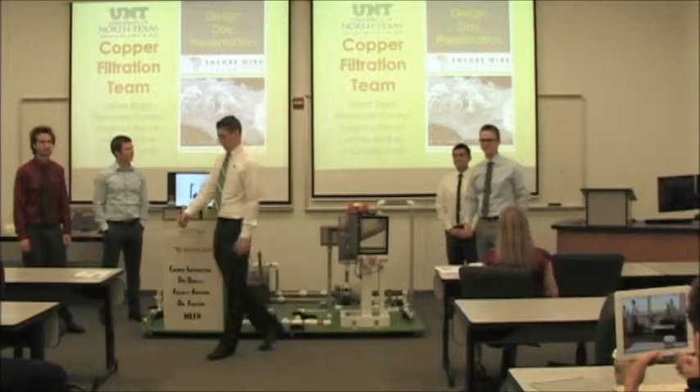So the problem statement: in Encore Wire's current wire drawing process, there are microscopic fines that are contaminating the lubrication system used to prevent copper from breaking. These microscopic particles produce heat, friction, and eventually a manufacturing shutdown because the wire breaks. So our task is to eliminate the current paper filtration being used and improve the current filtration amount that they're reaching.

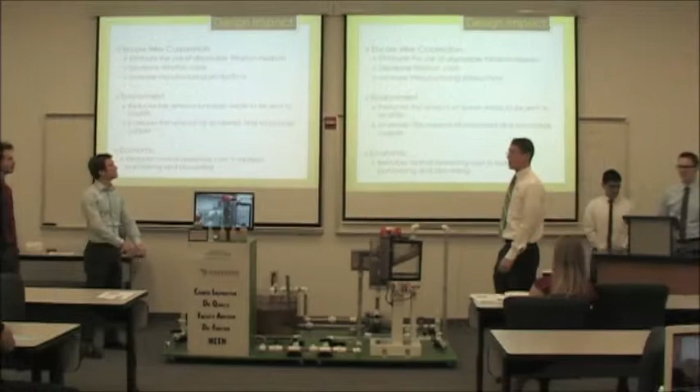Encore Wire wants to eliminate the use of paper filtration, and this is important because it decreases filtration costs, and also we can capture part of the copper that would be actually thrown away. This has an environmental impact because it prevents paper from being put into landfills, and is also recapturing the copper to be recycled and made into copper wire. So overall this will impact Encore Wire's manufacturing, purchasing, and discarding.

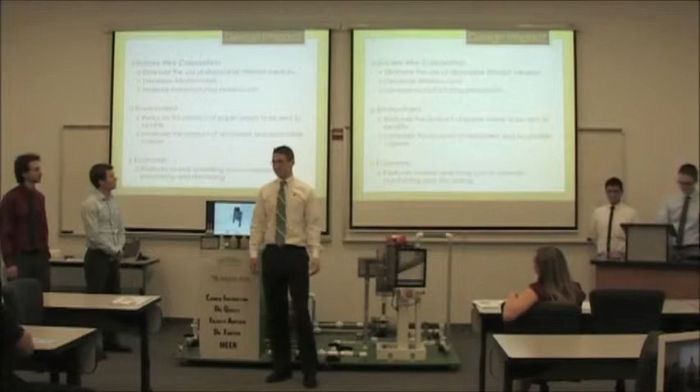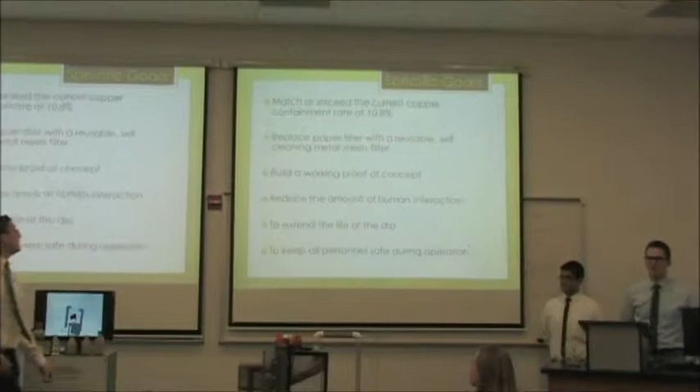Specific goals the team has set are to achieve the 10.8% copper containment that they're actually filtering with their current method, replace the paper with a reusable metal mesh screen, build a working proof of concept - as you can see here, we have that - reduce the amount of human interaction, extend the life of the dip, and maintain safe operation capabilities for their employees.

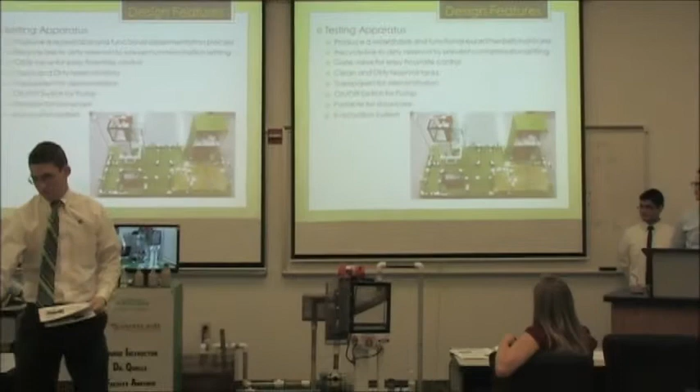Some of our design features and testing apparatus: we wanted to produce a repeatable and functional experimental process. Some of the pieces of it - here we have our 1 horsepower centrifugal circulation pump.

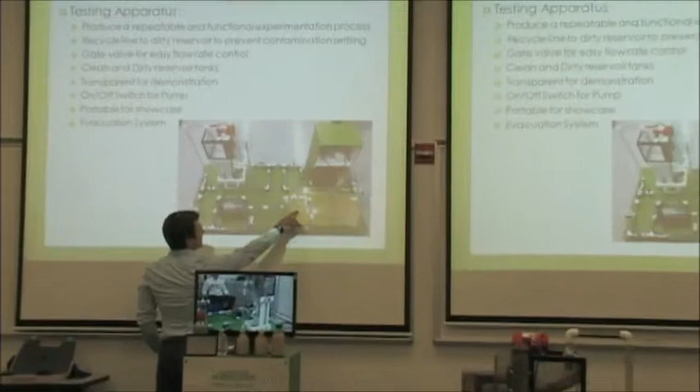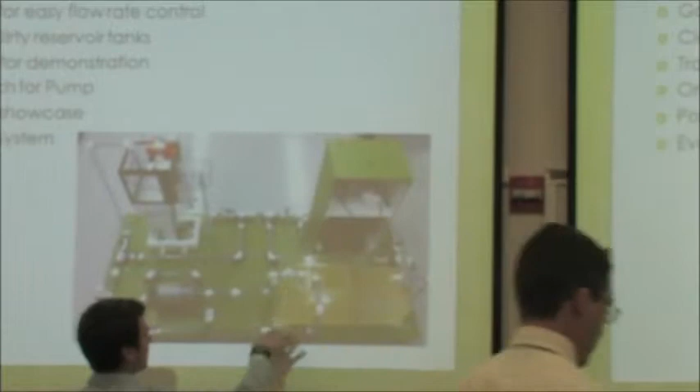It draws here, so here's your inlet pipe from the dirty reservoir, here's your outlet, and here you have a T to split that flow. There's two reasons for this. One, a majority of the flow is circulated in this recycle line back into the dirty reservoir, and that'll actually stir up the copper filtrate, the copper fines, so they don't settle at the bottom - we want to keep those agitated. Second, this blue handled gate valve allows us to closely regulate the flow we send through the rest of the system, because we can't flow 100% of it through our module.

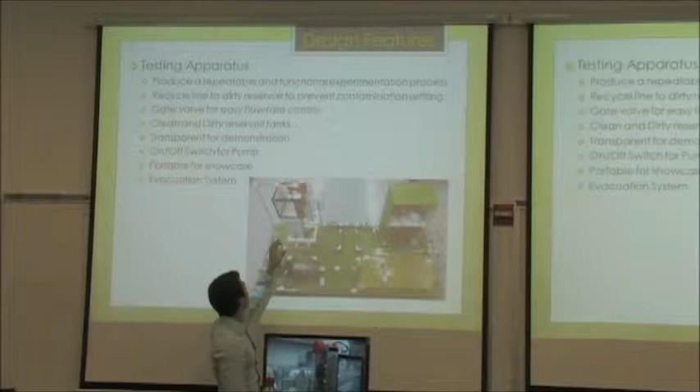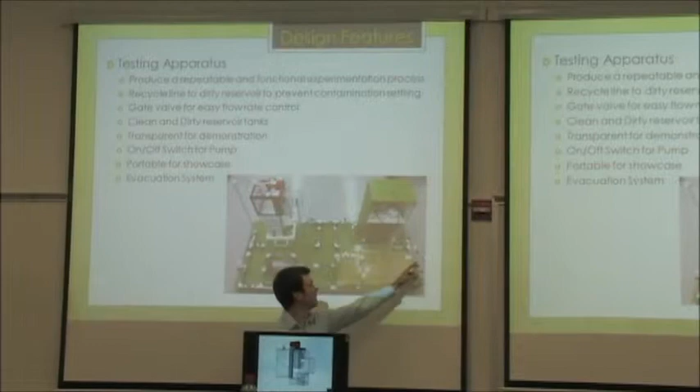So from here it goes into the module, goes through the vibration, comes out. Here's the clean that comes out here. It comes around, and then it is disposed back into the clean side of the reservoir right here.

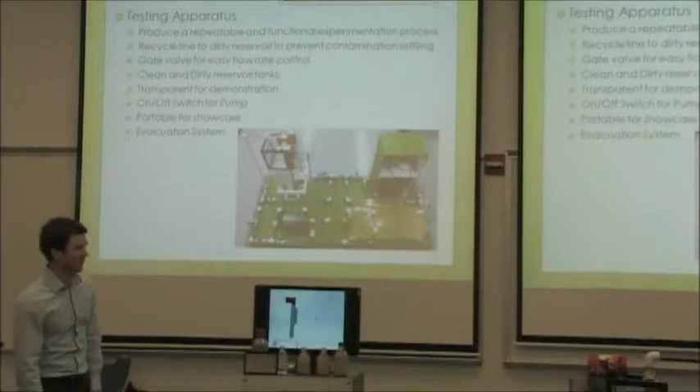It's transparent for demonstration - it was transparent before we put the copper in it. It will never be perfectly transparent again. It's portable for showcase. These latches right here in the corner can be unlatched, and you can see it's on wheels, so we can split those up and easily transport them.

And then we have an evac system. Under this box, we have a little air compressor that when we're done testing, we can isolate certain legs and hit that air, and we can clean up the system.

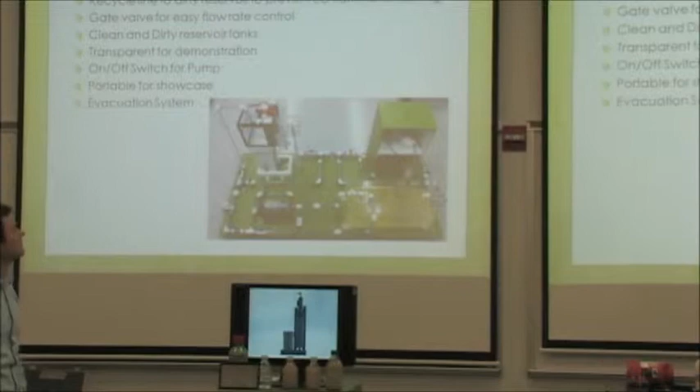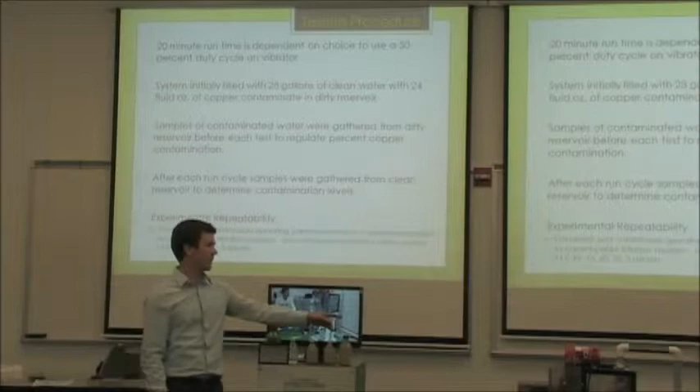Our testing procedure: we did a 20-minute run time with each of the different sizes of mesh. That 20 minutes was dependent on the 50% duty cycle of that vibrator, and Derek will go into that a little later.

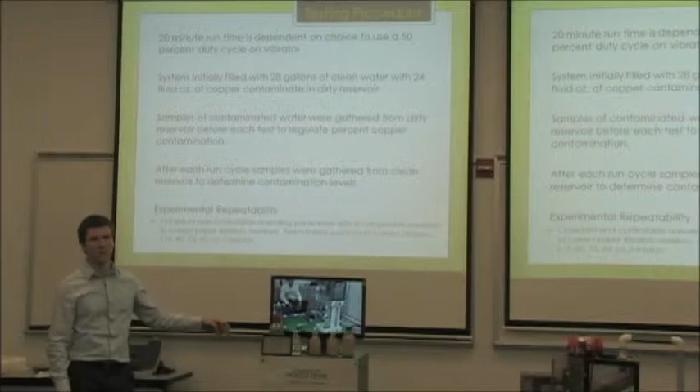The system was initially filled with 28 gallons of clean water with 24 fluid ounces of copper contaminant in the dirty reservoir, to mimic the copper concentration by weight that Encore is currently working with, based on samples we took there. Samples of contaminated water were gathered from the dirty reservoir before each test to regulate and get data of that sample.

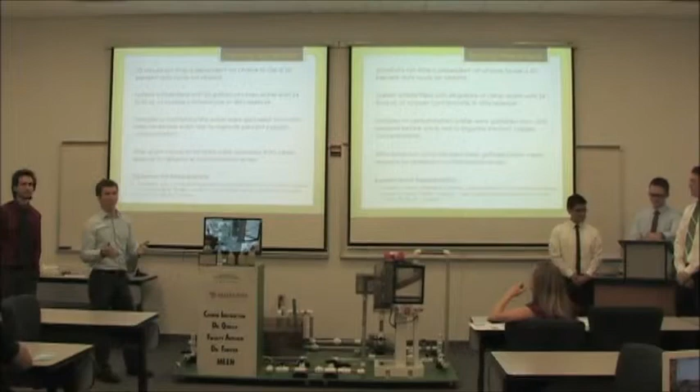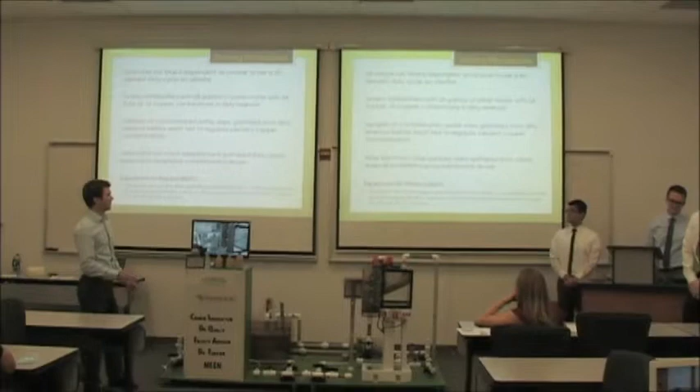After each run, samples were gathered from the clean side, and then we were able to make that comparison. Our experimental repeatability involved consistent control of operating parameters with a comparable baseline to current paper filtration medium. The team tested metal mesh screens of size 115, 95, 75, 60, 25, and 5 microns.

Data collection: for data gathering, we used a portable nephelometer, which allows us to check the turbidity of the liquid - pretty much just to check how clear the water was. It checks the particle concentration in the liquid.

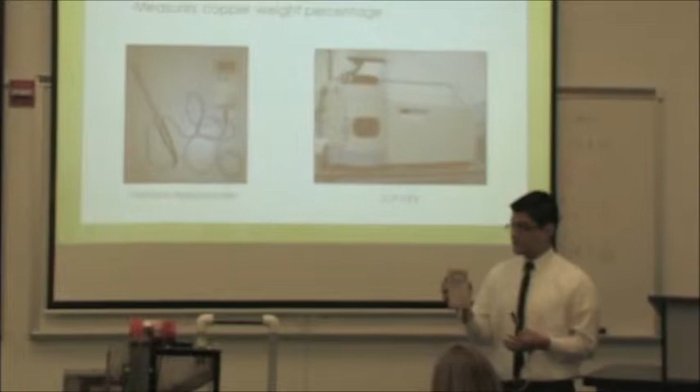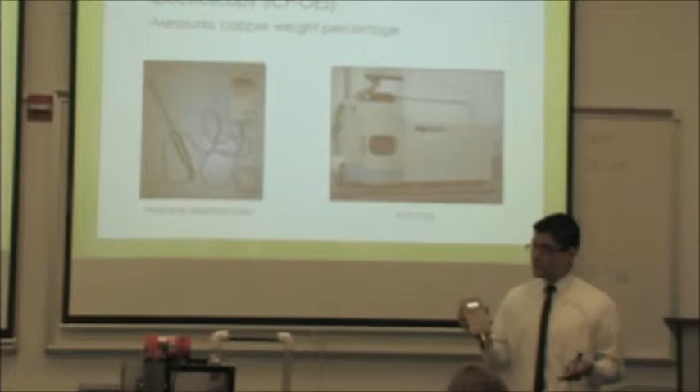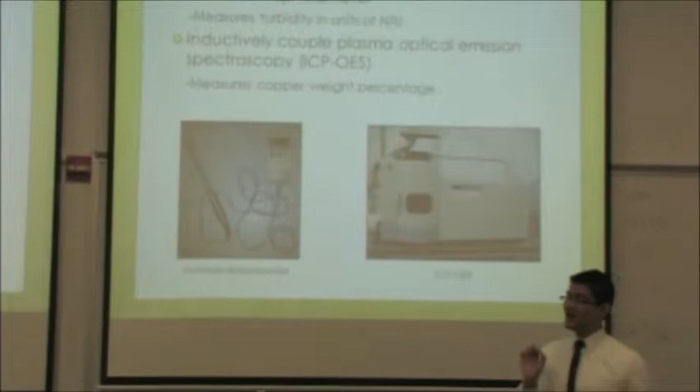This nephelometer gives us readings from 1 NTU to 2000 NTU, where NTU stands for nephelometric turbidity unit, the unit turbidity is measured in. We also used the ICP-OES - inductively coupled plasma optical emissions spectroscopy - and with that we were able to measure the weight percentage of the copper concentrate.

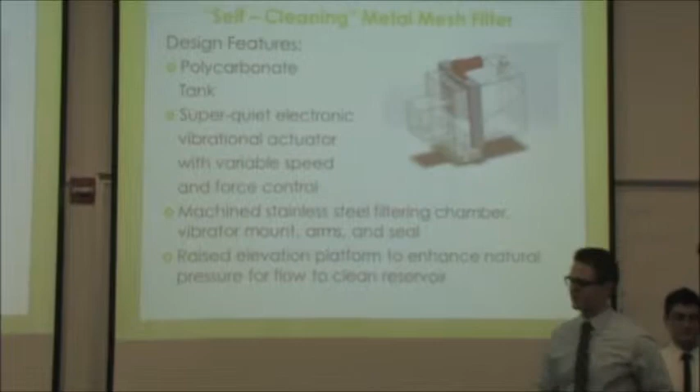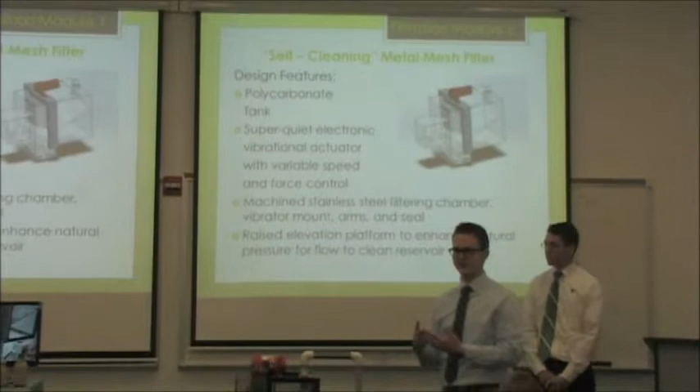So this is our filtration module 1. It's a self-cleaning filtration metal mesh filter. The principle is to actually have a metal mesh screen instead of the paper filtration in order to prolong use of it and be able to clean it and extend the life and reusability of the system.

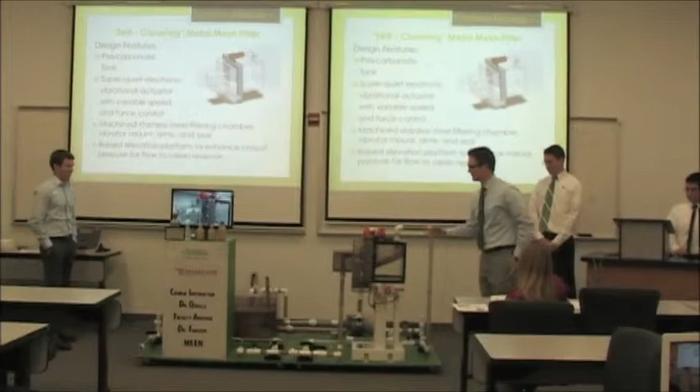Some design features of how we designed and built this tank is that we built it out of a polycarbonate material, so you could view and easily see where caking was occurring, where anything would happen during the process that we needed to monitor or look at and see what we could improve upon.

It also has a super quiet electronic vibrational actuator. It has a controlled variable speed and force, so we're able to change the dynamics of the experiment, of the vibrations, with either controlling the force inside the vibrator itself or changing the frequency at which it vibrates, the BPMs.

The machined parts of this design are the arms, a vibrator mount, a seal, and the filtering chamber, which houses all the clean lubricant or clean dip that we would have fluid going back over the clean reservoir. The idea is to have basically a seal coupled with a neoprene mesh square, and then our metal mesh. Then we have the neoprene seal again backed up to the housing and backed up to the actual filtration chamber.

The filtration chamber, as you can see, goes back here, is sealed, and then goes through there. So when this fills up, it actually looks like it's the dirty water back here, but the clean water is traveling through the piping system. Looks like that.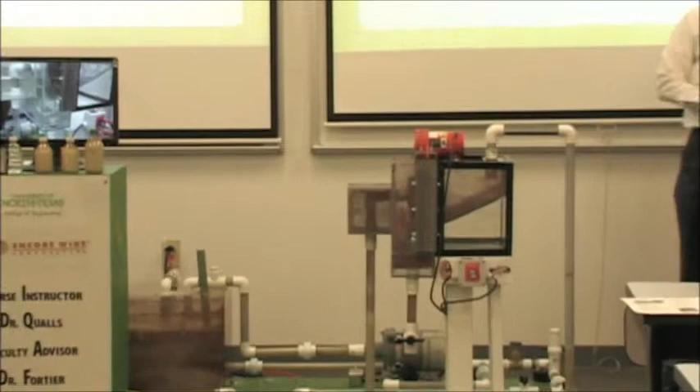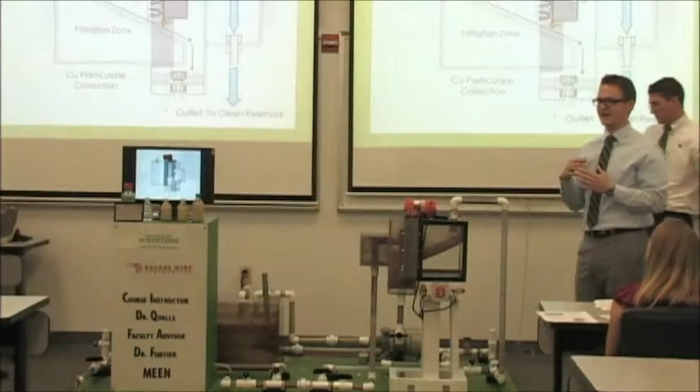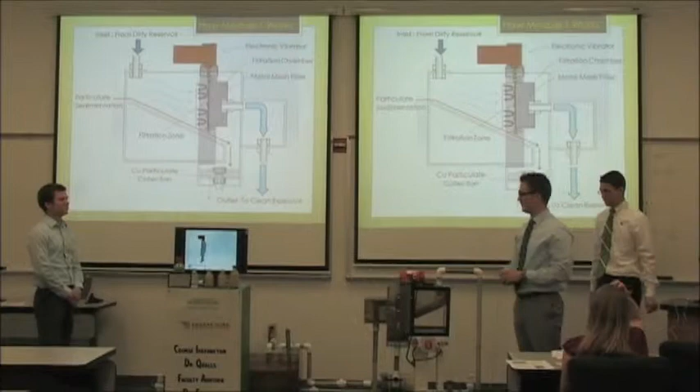So how it works. Basically, our system is just setting up a mesh screen. Now, you think that's pretty simple, but with adding vibration to it, we're able to enhance the cleaning and prevent caking upon the mesh screen. That's basically what we're trying to do. We're trying to increase the longevity of the screening and the filtering application by inducing vibration and localizing it in that area. So also what it does is it creates a filtration zone.

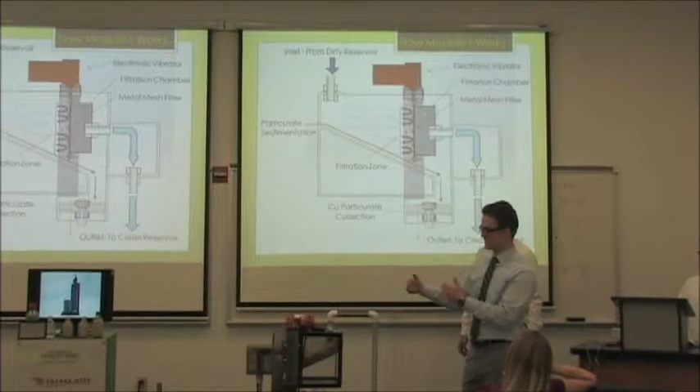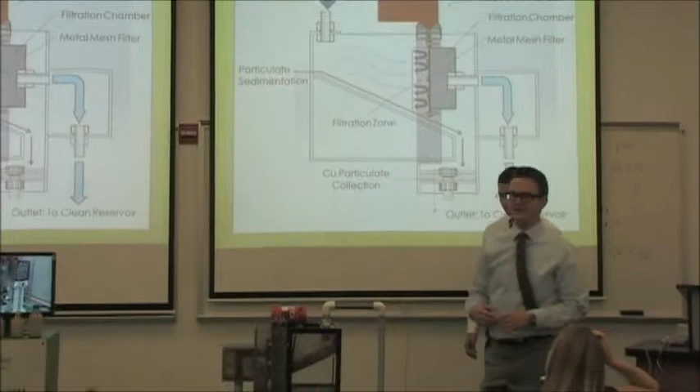As you can see on the chart I have where the arrows are rotating back. At this point, particles that are coming up that are not strongly forced to go through the suction of the screen will actually bounce back from the waves of vibration frequency and cake to the gravity slide, which is right here. This slide also incorporates another slide on the back side that goes down and couples into this downward pipe where we believe that the copper should have concentrated.

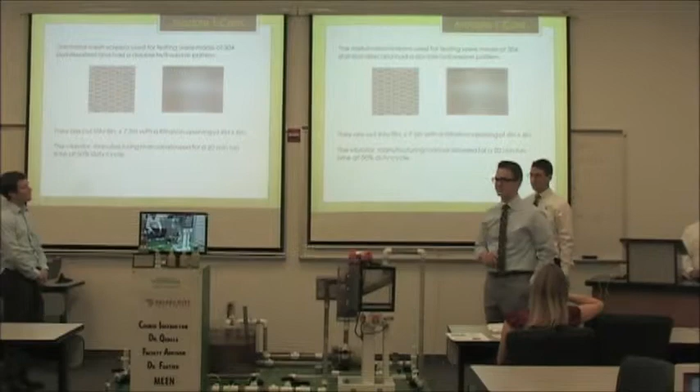So the mesh screens that we used were a metal mesh screen of 304 stainless steel that were double twill weave pattern, as you can see on this side. The reason we chose these was because of the durability with the vibration. We didn't want the mesh screens to break apart and not work. So we chose a pattern like that. They were cut into 8-inch by 7.5-inch squares, where the viewable range of fluid that would pass through was 6 inches by 6 inches.

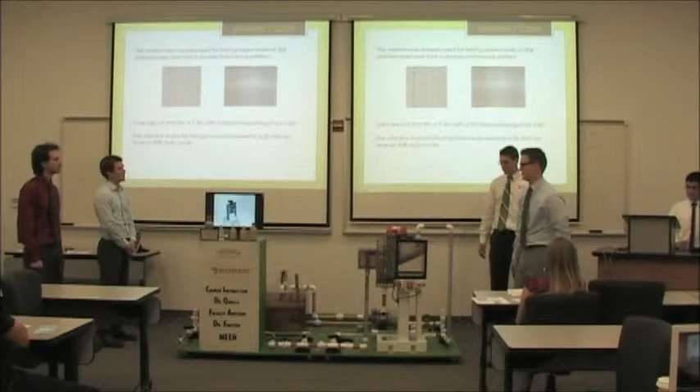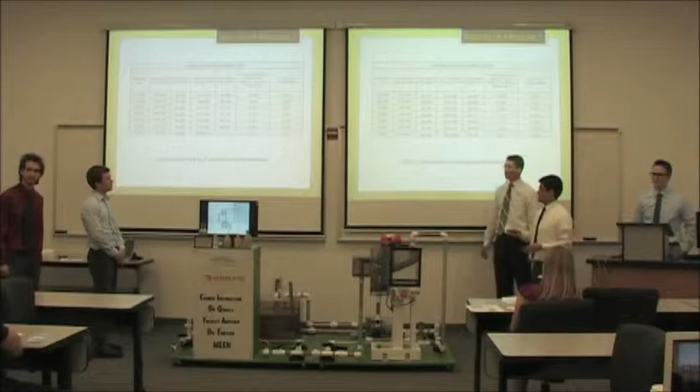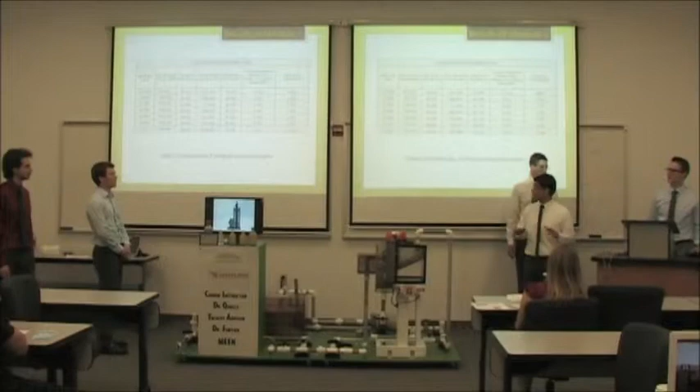So the results for this first module. Like Derek said, we took a sample from the dirty reservoir and we checked the turbidity on that as well. Then we ran the experiment and we took a sample of the clean tank and we checked the turbidity of that. This is the data right here. The results that we got were not very accurate, but it is important to mention that we did see a lot less concentration of the copper particles in the clean tank.

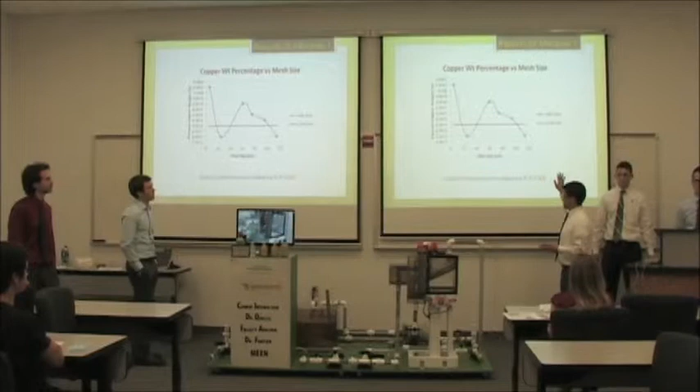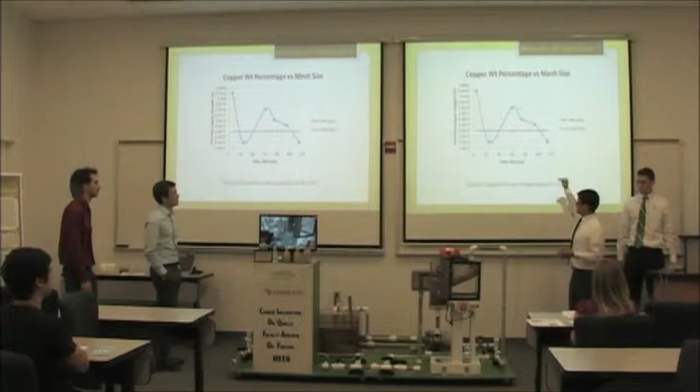So that was good. And then with the ICP-OES, this is the percent copper weight that we got from the results. The red line indicates the current copper filtration that they're using at Encore Wire. So the goal was to beat that. And as you can see with the 25 and the 115 micrometer mesh, we did beat, or we improved, the filtration system.

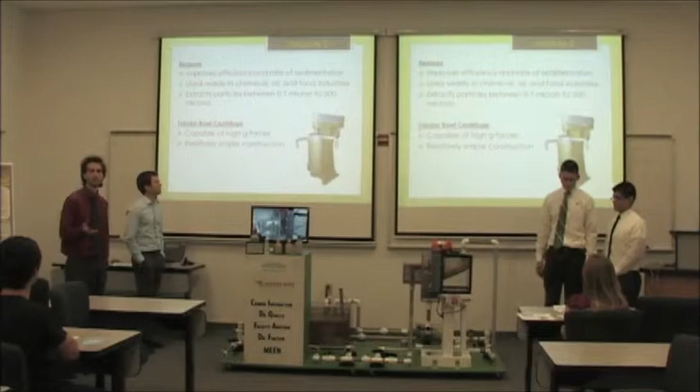Originally, our design also used a centrifuge to improve on their current sedimentation system. Encore Wire uses a sedimentation tank where they let the copper particles fall to the bottom under standard gravity, where they then scoop them out. Well, centrifuges would increase the efficiency and the rate at which this occurs. They're widely used in the chemical, oil, and food processing industries for filtering out small particles from fluids.

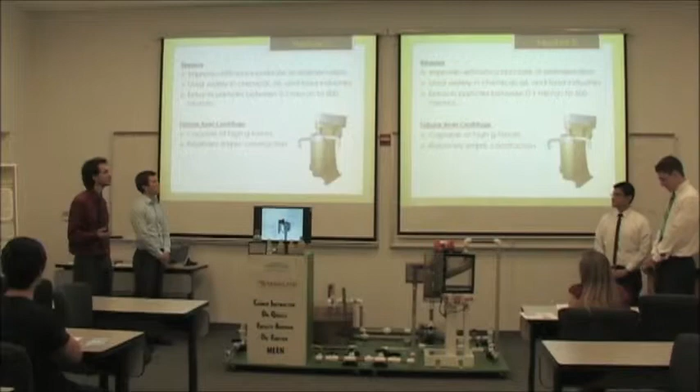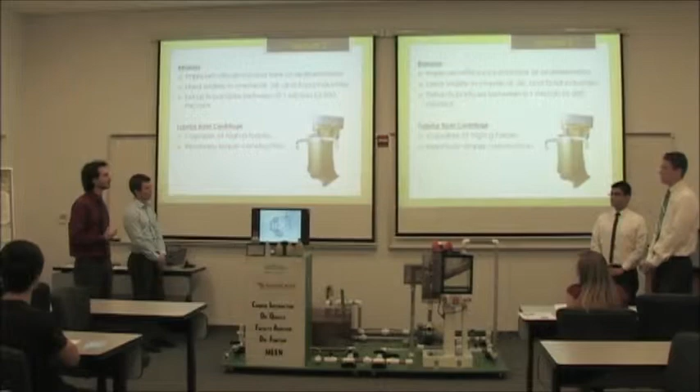Centrifuges can extract particles between 0.1 to 500 microns typically. And for our design, we decided to try to build a tubular bowl centrifuge because the centrifuge chamber is fairly simple to build, and we thought it was in the realm of what we were able to do.

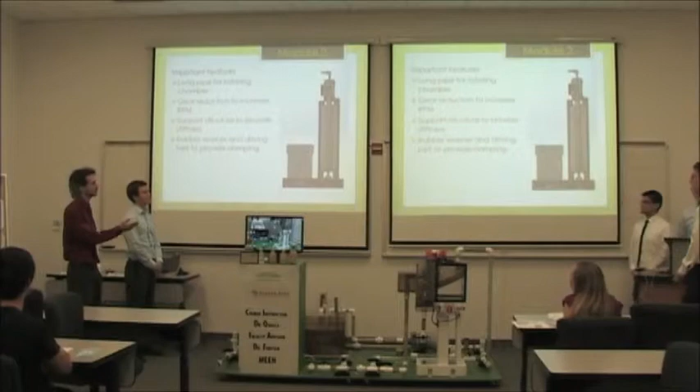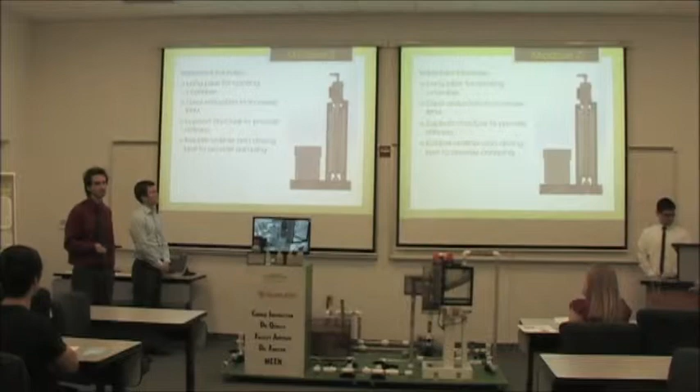For our design, as I mentioned, the centrifuge takes place in what is essentially a long pipe. We used a gear ratio to reduce the RPMs of the motor and increase the RPMs of what was being put on the centrifuge. And we incorporated structure to help with the stiffness of the system and rubber washers to improve the damping. A big concern with centrifuges is the vibration analysis to make sure they're steady, and both of these are very important to making sure everything stays stable.

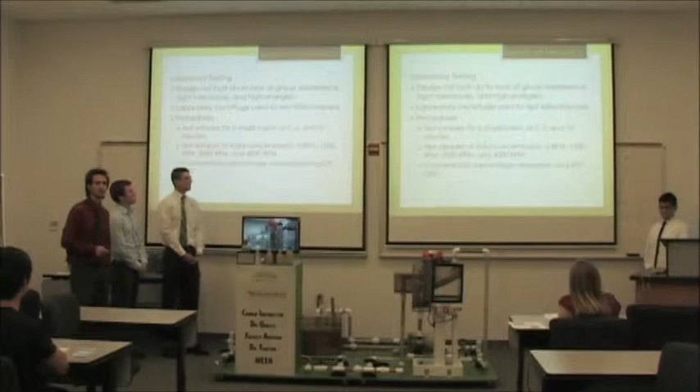We didn't go ahead and build the centrifuge because our team lacks experience, and there's really tight tolerances necessary for these centrifuges to operate safely, and they operate at high energies, so to keep everyone safe, we didn't go ahead and build it. So instead, we used a laboratory centrifuge that Encore has on their premises to run small-scale experiments of the dip under centrifugation.

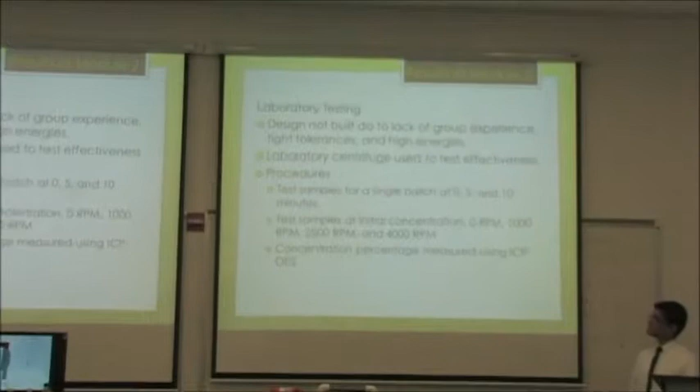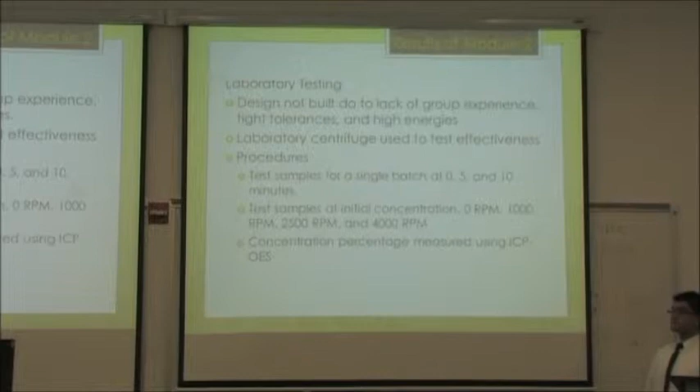And our procedure for this is we tested a baseline sample of their initial concentration, and then samples at 0, 5, and 10 minutes afterwards. And we tested the samples under standard gravity, and then 1,000 RPMs, 2,500 RPMs, and 4,000 RPMs. And then we sent the samples to the ICP OES in order to measure the concentration by weight of the final samples.

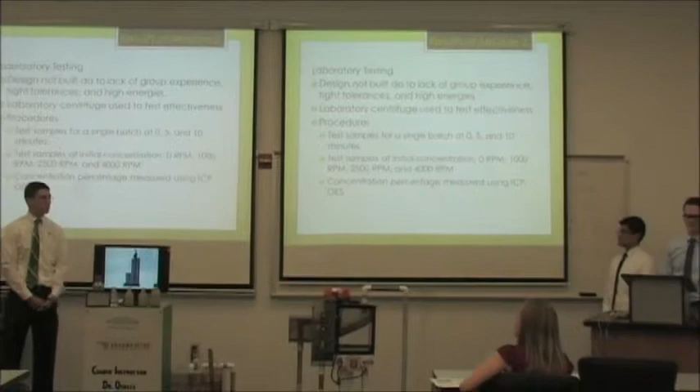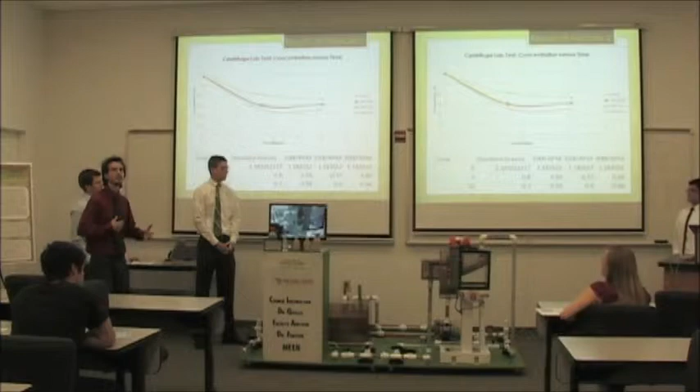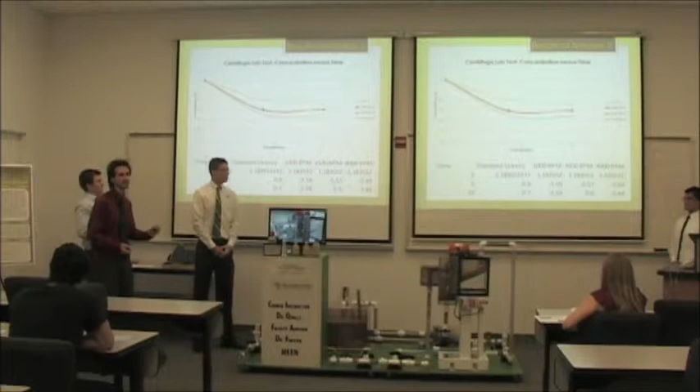And then from 5 to 10 minutes, there really isn't much of an increase in separation. There's a little bit, but not a whole lot. So if we were to implement this in a full-scale version, you'd be able to do it quickly and you wouldn't have to worry about running it for long periods of time. Because of the amount of time it took to process each sample, we were only able to take a limited data set. So if we were to run this again, we would definitely concentrate between the 0 and 5 minutes to pin down how long it takes.

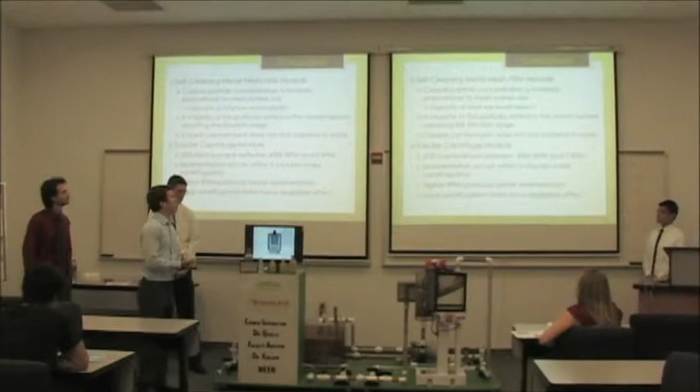So our conclusions: for the self-cleaning filter module, copper particulate concentration is inversely proportional to mesh grain size, which is opposite of what we expected. So common sense would tell you the bigger meshes would allow more copper fines to get through, but from the graph you saw that was not the case.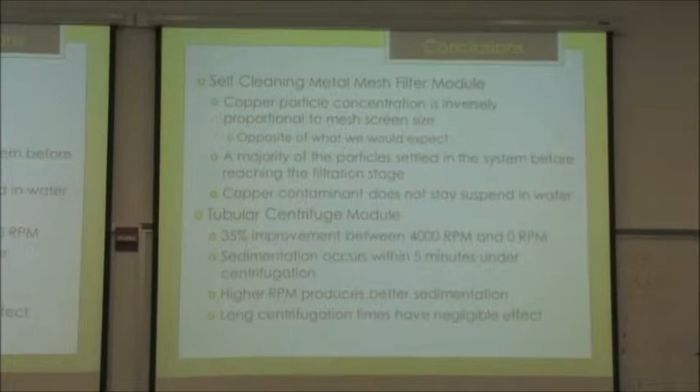Part of the reason we believe that happened, a majority of the particles settled in the system before reaching the filtration stage. So a lot of it, as you can see, settled in the piping. Quite a bit of it settled here on the ramps. So we don't believe that we were able to actually get a true sample at the front of the mesh screen. The copper contaminant does not stay suspended in water.

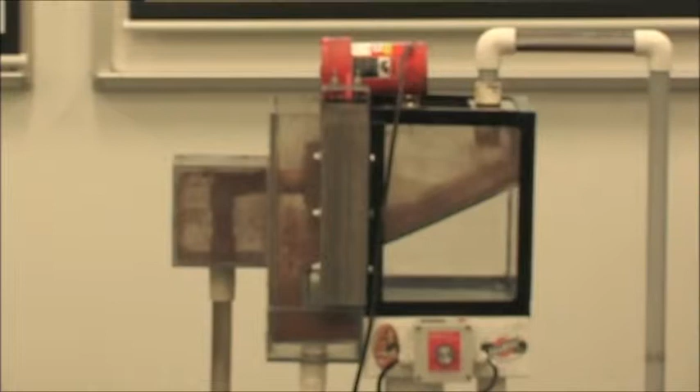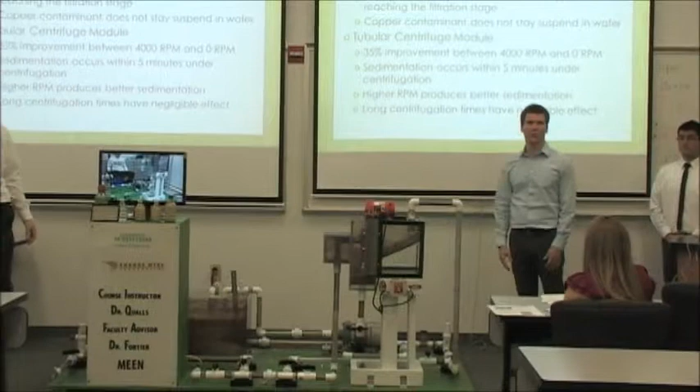So Encore, they actually use a dip solution that is 91% water, 9% of the oil detergent, which obviously the oil gives that fluid a higher viscosity. So the copper fines will stay suspended in there a little better. Whereas we just made the assumption and used water, because we didn't really want to have to transport 40 gallons of that here. I don't even know if we would have been allowed to do that. So obviously with just water and lower viscosity, that copper was more easily settled at the bottom, so we weren't able to extract as much.

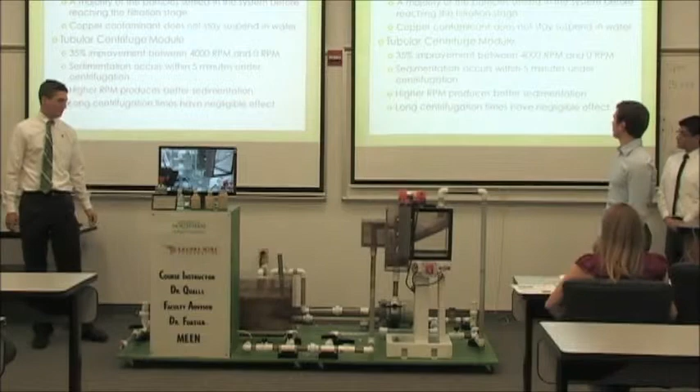For the tubular centrifuge module, we had a 35% improvement between 4,000 and 0 RPM. So the 0, like Sigmar said, is at standard gravity. Sedimentation occurs within 5 minutes under centrifugation. The higher RPM produces better sedimentation, and long centrifugation times have negligible effect past the 5 minutes.

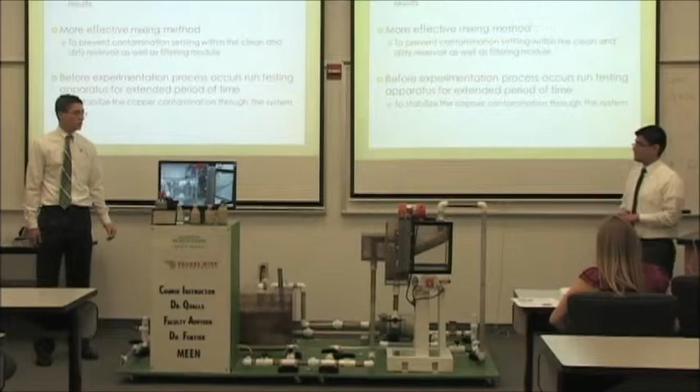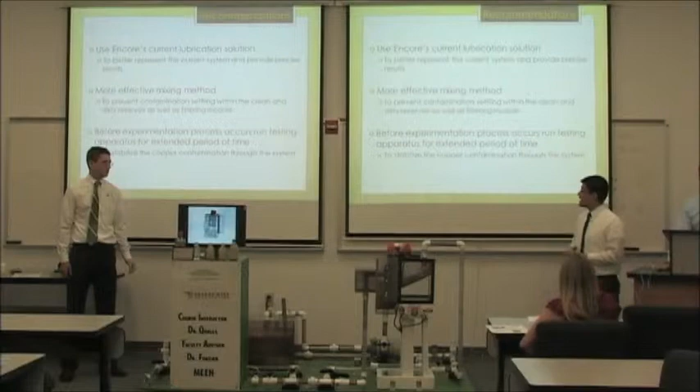And some recommendations. We believe that if we were to use Encore's current lubrication solution, it will give us a better representation of what this filtration system will do, and therefore will give us better results.

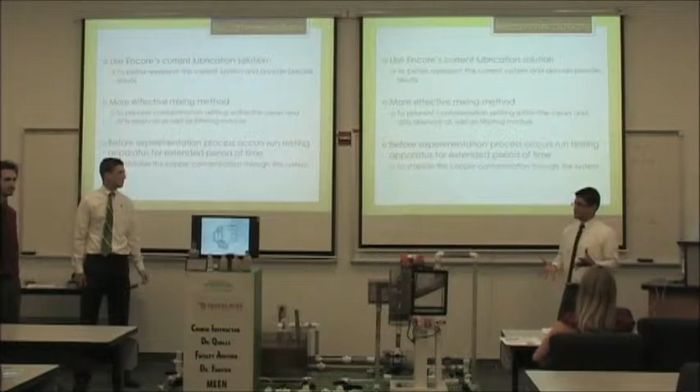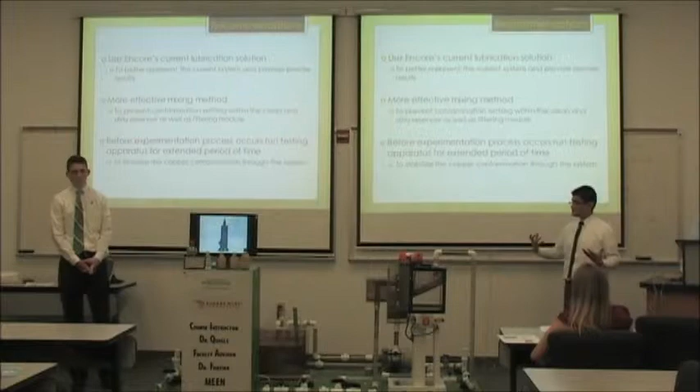A more effective mixing method: like Chandler said, a lot of the copper particle contaminant was settling at the bottom of the tank. They explained how we had a recycling system that will shoot down the water and that will mix it. Unfortunately, that didn't work in our favor too much. It definitely did stir the tank, but not as much as we wanted to. So by adding some sort of other mixer that will allow those copper particles to mix in the liquid and then go through the system, that will definitely benefit the project.

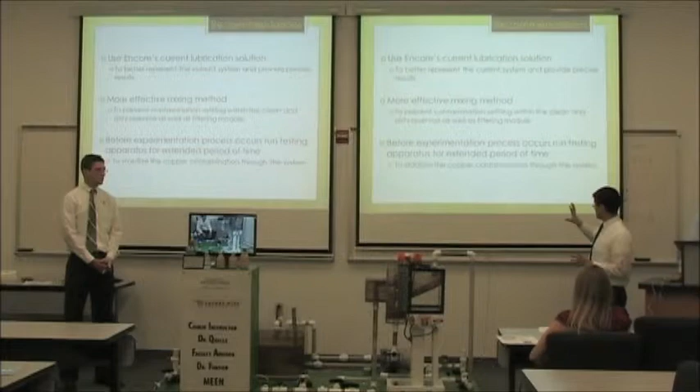Before experimentation, run the testing apparatus for a longer run, just so the system can stabilize, and that way the contaminant will go through the entire system.

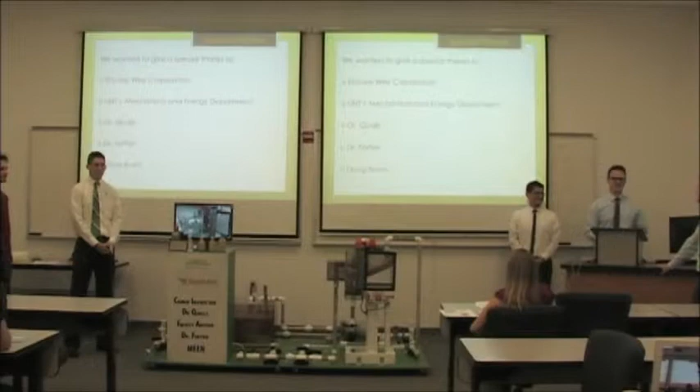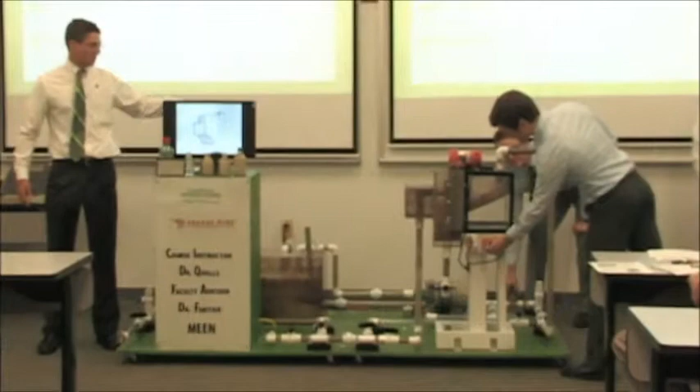So now we would like to do a live demonstration of the actual filtration process itself. Recycle stage is what happens first. As soon as Derek turns the throttle, the liquid will be able to go and exit into the module 1. We set it at 50% vibration. That's what we tested it with.

So as the water fills up, you can see the tube line in the back. At the tube line, as soon as the water gets to that point, that's when the filtering actual clean liquid starts coming out and going over into the clean reservoir.

This stabilized bar in the back of the vibrator actually allows for us to concentrate the vibrations of the vibrator directly onto the screen and its applications. We have a double screen dampening system on both sides. This allows for the cantilever effect of the weight of this vibrator as well as dampening the vibrations to the entire system and shaking not only just the screen but the tank.

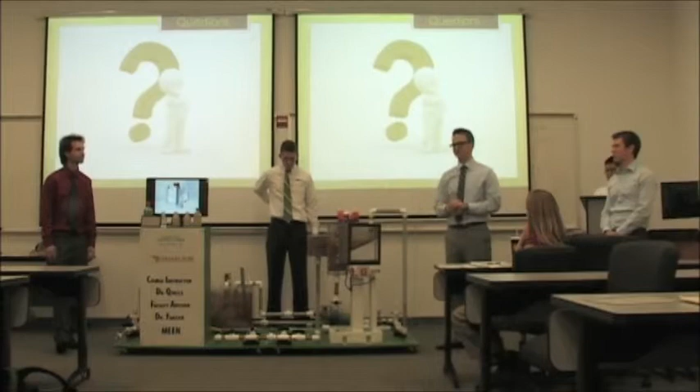I would probably go for like 3-month cycles. The reason I say that is because they don't run the secondary stage filtering process every single day. Justin, do you know if you run it every single day? Sometimes it'll be down. So yeah, it does have time to actually rest, and based on what we've seen, the sturdiness and the ability of the screens, I believe that they would actually be able to implement the system. And the cost of the screens themselves isn't actually that detrimental. That screen itself probably cost about $35.

And it also depends on a lot of variables, like what kind of flow they'd want to get. If they had multiple ones of these side by side in parallel, each one would last longer; they'd have bigger surface areas, so less caking. So there's a lot of variables, but yeah, I think the 3 months is.